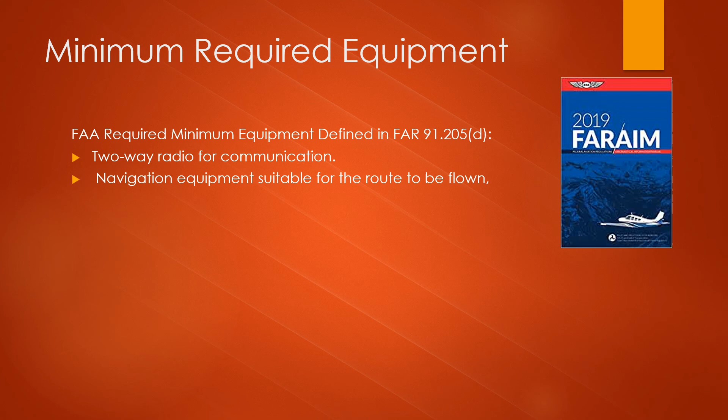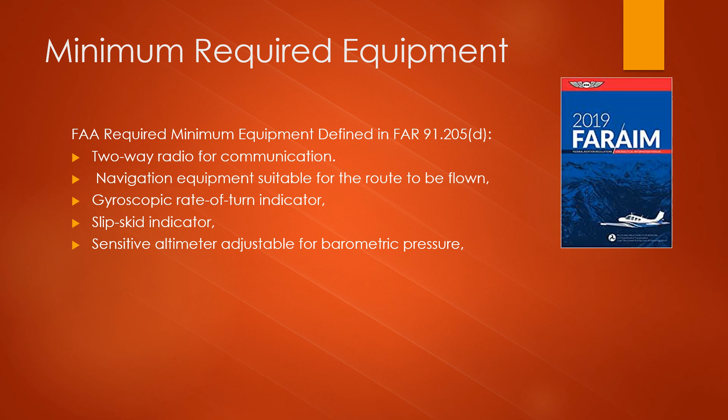Two-way radio communication. Navigation equipment suitable for the route to be flown. A gyroscopic rate of turn indicator. Slip and skid indicator. Sensitive altimeter adjustable for barometric pressure. A clock displaying hours, minutes, and seconds with a sweep second pointer or digital presentation.

Generator or alternator of adequate capacity. Gyroscopic pitch and bank indicator, and a gyroscopic direction indicator.

Remember that these are only minimum requirements. Most IFR flights will require more equipment to be safe and legal.

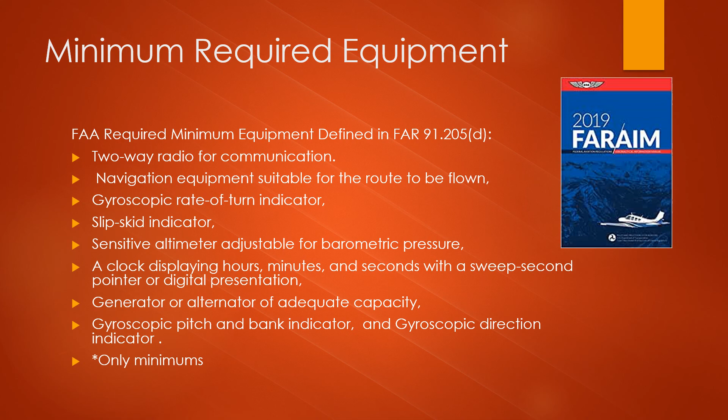In addition to the minimum required IFR equipment, specific equipment is usually required to fly an approach based on the type of navigational aid the approach uses.

For example, if flying a non-precision approach, as in a VOR approach, a VOR receiver is required. If using an ILS approach, you will need a localizer receiver, a glide slope receiver, and a way to identify marker beacons.

Remember that many electronic flight displays, like the G1000, will meet all these equipment requirements, and an IFR certified GPS can often meet the need for a DME or ADF equipment.

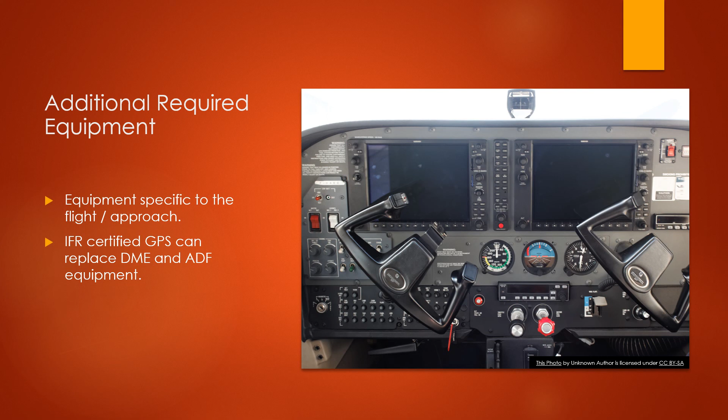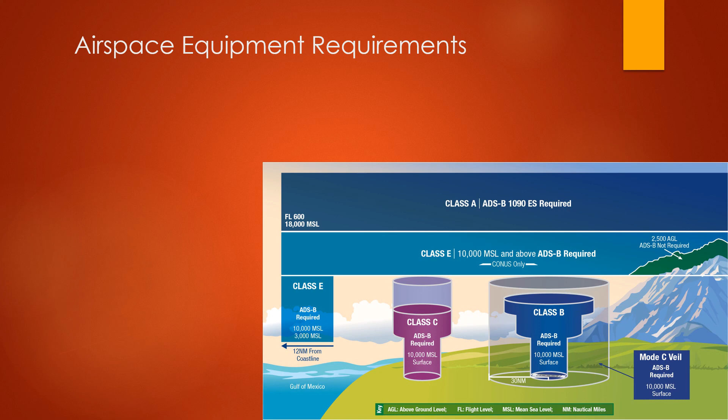If your flight takes you into Class A, B, C, or D airspace, you will need additional equipment. In Class D airspace that falls within 30 nautical miles of Class B airspace, a transponder is required. In Class C airspace, a transponder with Mode C is required.

In Class B airspace, in addition to a Mode C transponder, VOR navigation equipment is required. Class A airspace requires a Mode C transponder as well. Of course, for the most part, anywhere a transponder is required, an ADS-B out transceiver is also required, including Class E airspace above 10,000 feet where a Mode C transponder is also required.

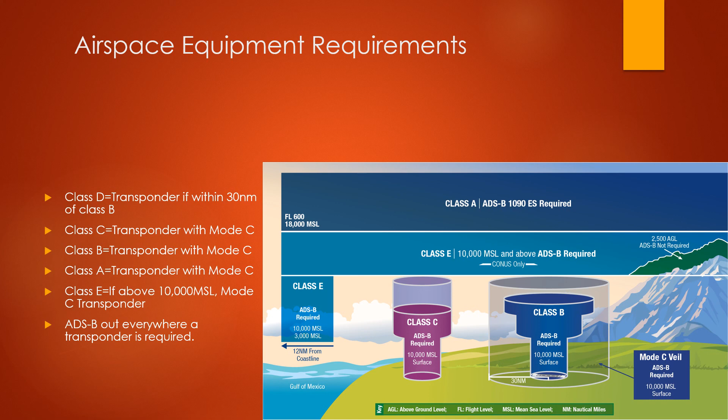Check aircraft logs to verify the pitot-static system and altimeter inspections have been completed within the last 24 calendar months, and the transponder inspection within the last 24 calendar months, if equipped and used for the flight.

A VOR check within the last 30 days is required if VOR receivers are to be used. However, testing the VOR should be done as often as possible.

If GPS is to be used for an IFR flight, verify in the POH or AFM that it is an approved installation and can be used for the flight desired. If the GPS will be used for an approach, it must have a current database. A GPS database that is not current can be used for the en route portion of the flight, but the data for the route must be valid.

A RAIM prediction should be obtained prior to the flight using the receiver itself or a commercial flight planning service to verify satellite coverage for the trip. If the GPS is WAAS equipped, the RAIM information is not required.

When flying IMC, a thorough pre-flight inspection is even more critical than when flying VFR. A problem experienced while in IMC can become much more severe than when in visual conditions.

Special attention during the pre-flight should be given to the aircraft's antennas, both communication and navigation. The pitot-static system, including the pitot tube and the static port, should be carefully inspected to ensure there is no blockage or damage. The pitot tube heater and any other anti-icing or de-icing equipment should be checked. These include the carburetor heat and the windshield defroster of the aircraft.

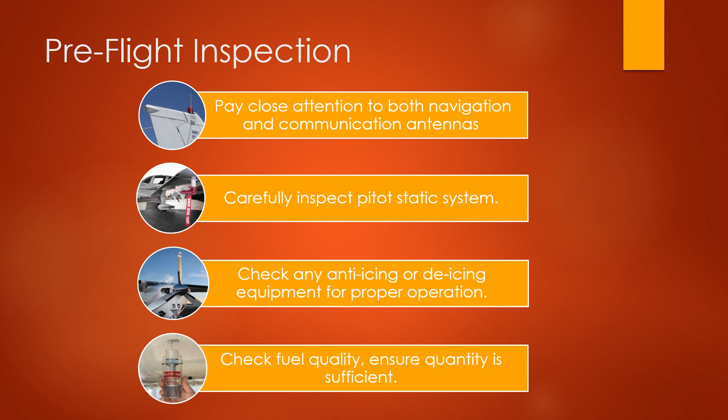During pre-flight, instrument checks should include the following. For electronic flight displays, confirm the annunciator for low volts, low oil pressure, and low vacuum. There should be no red X's over anything.

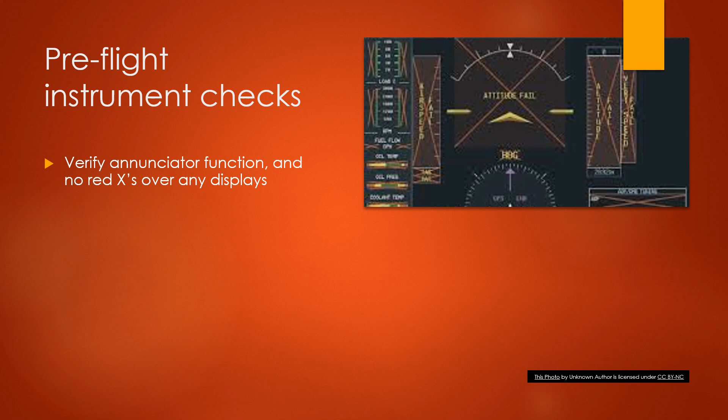If equipped with analog gauges, turn on the electrically driven instruments and listen for unusual noise. Check the compass for fluid that is full, free of bubbles, and not leaking from the case. The compass should have a current correction card.

Airspeed indicator should read near zero, and the altimeter must read within 75 feet of airport elevation when set to current pressure settings. The vertical speed indicator should read zero. If it does not, note its position and use that position to indicate level flight.

For attitude indicators, make sure the horizon bar is level. This should happen within 5 minutes. Turn coordinator should indicate miniature airplane wings level and ball centered if the ramp is level. Set the horizontal situation indicator, or HSI, to match the compass. Make sure the clock is set to the correct time, and check the alternate static source.

Remember to verify proper operation of the flight instruments during the taxi portion of your flight.

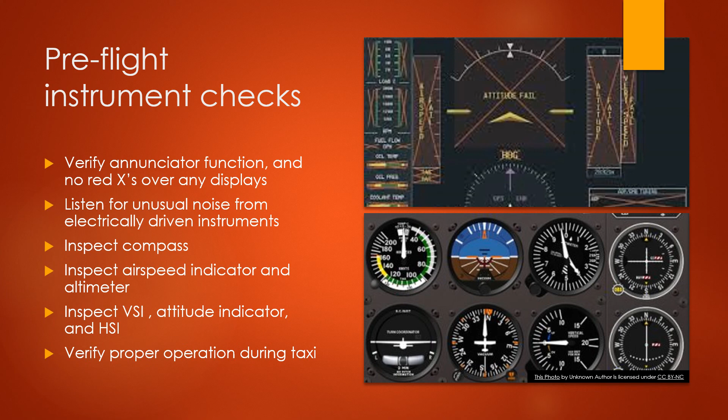Flying IFR is a rewarding experience. You have the rating to fly in IMC and must face the challenges that go with it. You must learn to stay within the limits of both your own skill and the aircraft. But with proper planning and risk management, including a thorough pre-flight inspection, instrument flying can be both safe and enjoyable.